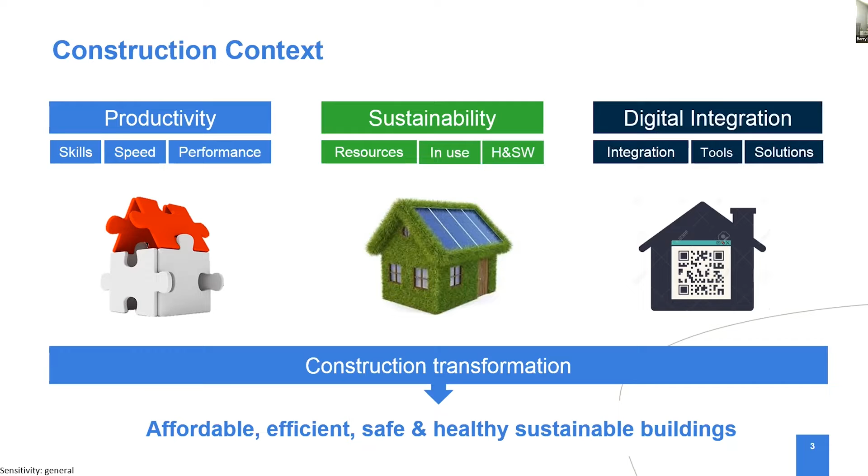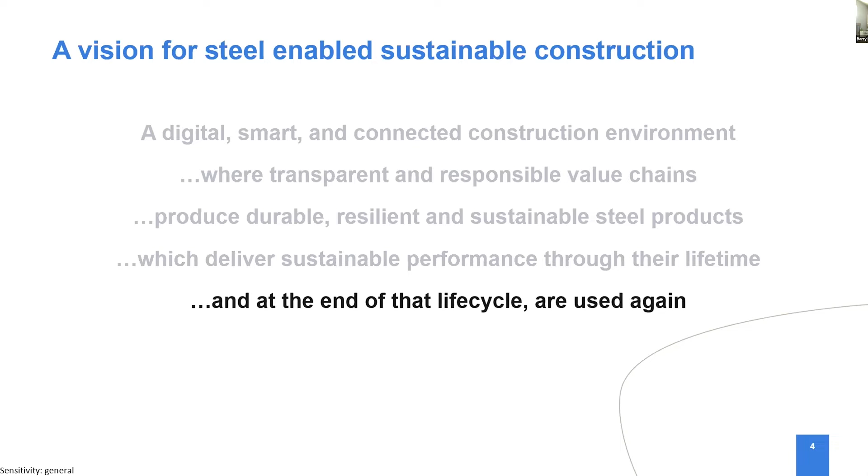So in that context, I'd like to describe our vision for steel-enabled sustainable construction. That is a digital, smart, and connected construction environment where transparent and responsible value chains produce durable, resilient, and sustainable steel products, which deliver sustainable performance through their lifetime. At the end of that life cycle they are used again. And if not used again, then they're returned to where they were produced to be recycled in a carbon neutral cycle with zero waste.

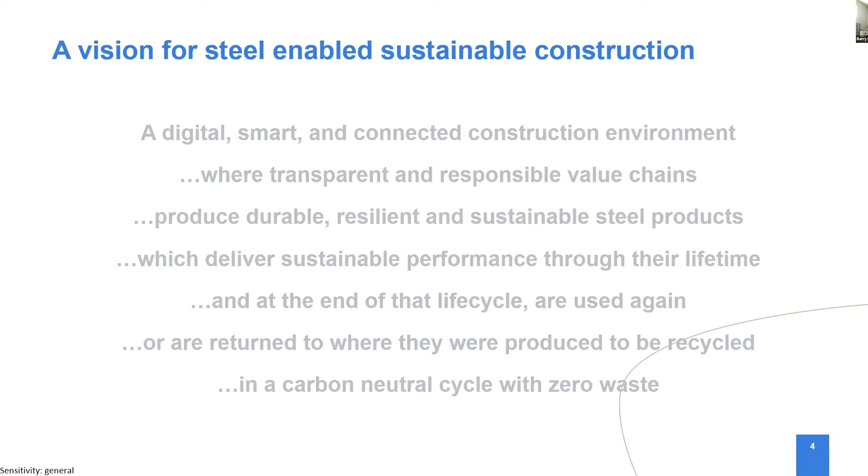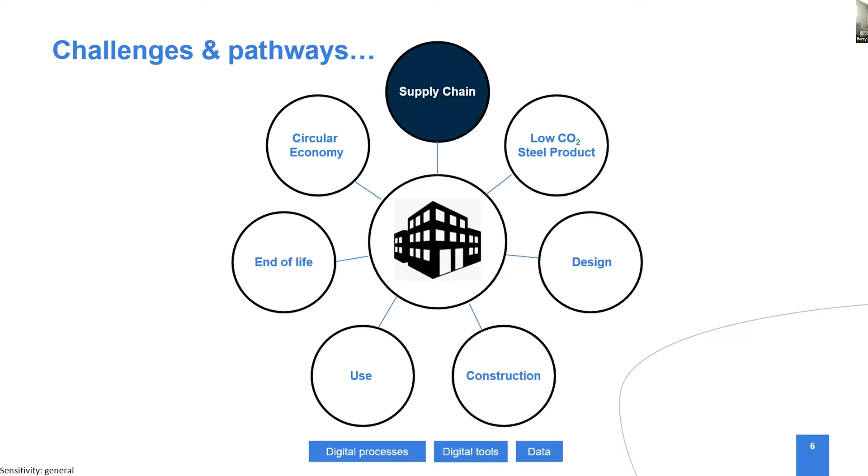Then shown at the bottom, rather underplayed in this schematic, but it's the only way I could think of fitting them in, is the foundation of digital processes, digital tools, and data, which will underpin and enable most, if not all, of this vision. So we'll use this schematic as our map over the next 12 minutes to describe the challenges and potential pathways to that vision, starting with the steel supply chain.

Stephen's already mentioned in his presentation transparency, reporting, and a just transition, which is absolutely essential. A key part of our work with the steel supply chain and the construction supply chain is around transparency and reporting. Those two items are also the foundation of our sustainable development work within Tata Steel.

Within Tata Steel, sourcing from responsible supply chains and our responsible operations are at the core of what we do. One example of that important work is the left-hand graphic here, which shows a BES 6001 certificate. BES 6001 is a responsible sourcing framework originally developed by the construction sector, as it happens, covering organizational management, supply chain management, and the management of sustainable development.

Our entire construction portfolio across Tata Steel, 14 product groups in total, is certified to this third-party and audited certification. In the center of this page is something I'm rather proud of, actually. It's a governance document for Tata Steel's Environmental Product Declaration Program. And Stephen already mentioned some ISO standards around declarations.

And environmental product declarations, for those that don't know, are a standardized way of describing the impact of a product in environmental terms over its whole life cycle, from raw material extraction to end-of-life disposal, reuse or recycling. And Tata Steel operate the only manufacturer-led ISO EPD program in the world. And we now have over 50 EPDs across our construction portfolio, all of which are third-party verified. And I reiterate that transparency and reporting must be the foundation of that construction transformation.

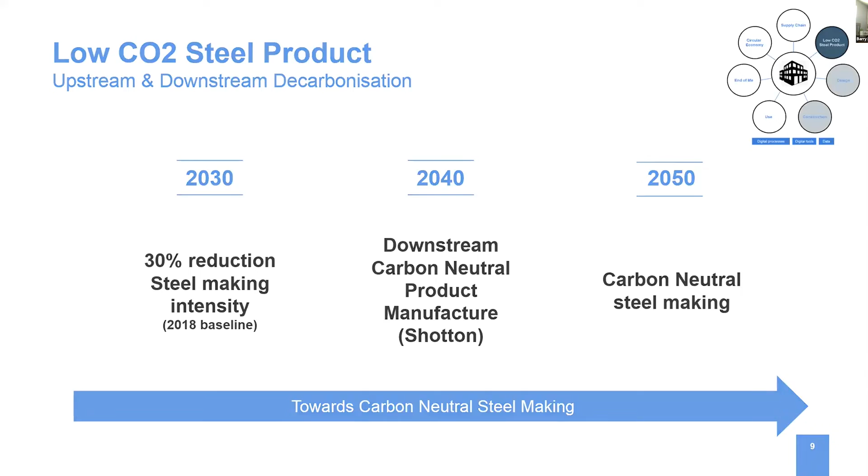So moving on to design and construction, here we'll focus on the productivity issue, which is being addressed through a number of potential solutions, and one of those is a modern method of construction called construction platforms. And the concept's pretty straightforward. It's based on the premise that buildings are designed at the moment as somewhat unique one-offs. This leads to a massive variation across building design and construction, and is the antithesis of economies of scale. And compare that with the automotive approach, where an automotive company might have 3 or 4 chassis, which are the foundation of its 15 or 16 models.

Now, the construction platforms approach borrows from this, with a small number of standard designs for building types and a relatively small number of parts or products, which, like the automotive sector, are homologated as well. This allows for standardization across the products, with the building components fabricated off-site, which can then be rapidly assembled through automated processes. All this helps to deliver the productivity improvements we've been talking about, as well as building with lower carbon intensity in a safer and more cost-efficient environment.

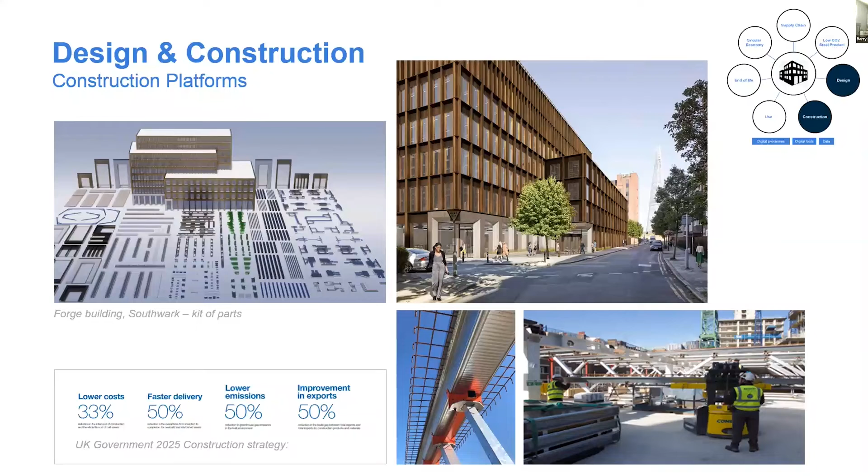So we could have talked about other modern methods of construction and the suitability of steel across those modern methods, but unfortunately we don't have time. But if any of these areas are of interest, or this slide's of interest, I'm not the expert on this particular aspect of Tata Steel's work, but my colleagues are. So please do contact us to talk about it if it's of interest.

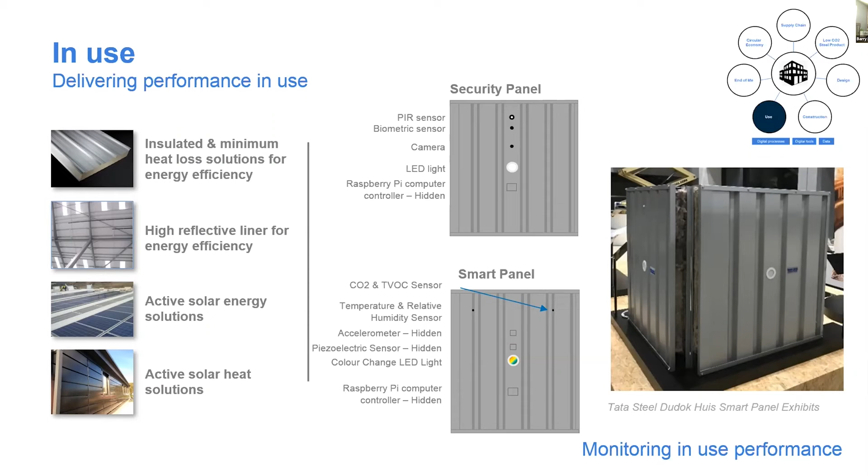So monitoring of in-use performance of buildings is an area that the construction sector really lacks data and understanding. And this feeds into an inability to understand performance gaps and how we might improve on those. So on the right-hand side of this slide here is an example of how steel-enabled construction products can assist in this challenge. So these are two insulated built-up panels with an array of embedded sensors and monitoring equipment. They were produced by Tata Steel panels. They were a Blue Sky pilot panel, and they were for an event in one of Tata Steel's facilities. But they demonstrate that the technologies and the capabilities exist to drive improvement in this area of in-use performance monitoring, and steel-enabled products can play an important role.

So we're moving on to a quiz, which might be rather boring because you can't shout out the answers, but I'd like to do a quick quiz on a spot the difference. So here we have two pictures of the same skip, which is in front of the garden of one of my colleagues who's having a new kitchen fitted. In the skip on the left, we have a range of waste materials, lots of waste wood, which is typical of a construction project, some concrete, some glass, and a couple of steel and cast iron items. Effectively the oven that he was taking out and the iron grating from the hob itself. And on the right hand side, we have an image taken only a few moments later. And so can you spot the difference?

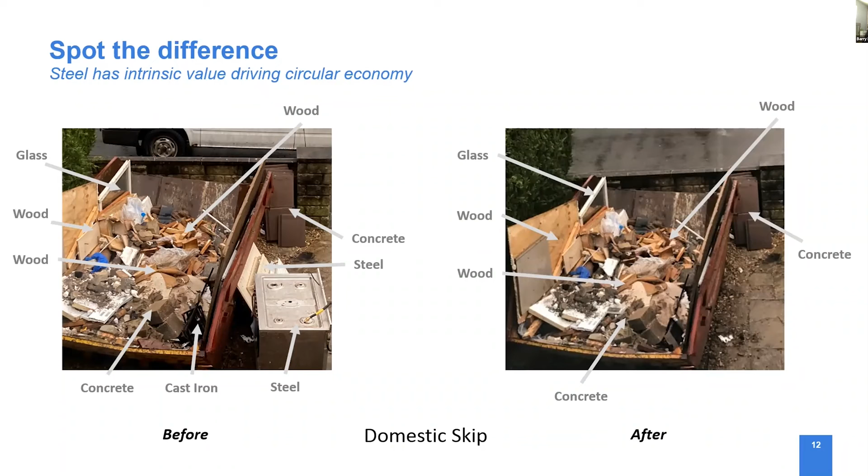Yes, the metal's gone, the steel's gone, the iron's gone. Why? Well, because our local circular economy operatives have removed it. And that's because it has value, and that value will enable circular economy. And that material will go back into a steel supply chain.

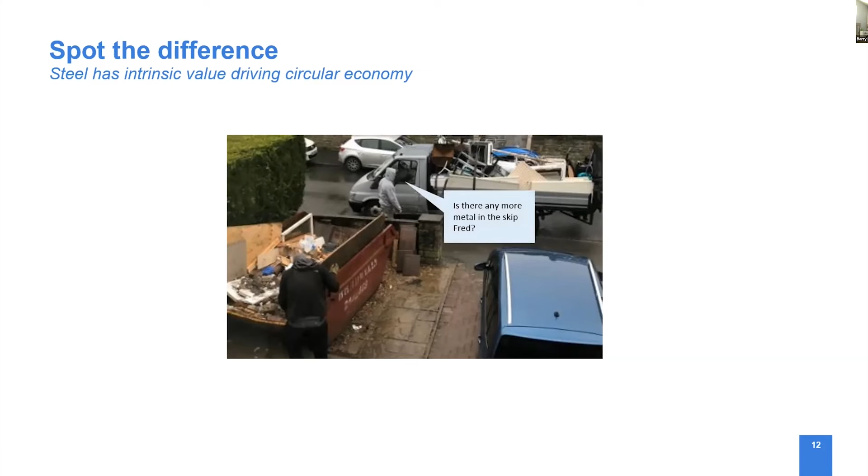And I think most people, certainly a lot of people on this call, will be very aware of the credentials of steel for recycling, and there's still challenges around that. Contamination, Stephen's already mentioned, but we mentioned in our vision reuse, which is where we would also prefer to be in terms of the waste hierarchy.

And in the steel, this was achieved by adapting anchor bolts for demountable beams and column connections. All the cladding connections weren't shot connections, they were demountable connections. And the design utilized standard beam and column dimensions for the entire build for consistency through the build.

And standardization, of course, is only one of the many, many challenges for a future reuse market. And all the materials were catalogued in a building material passport, or a database containing all the steel specs and dimensions for future reuse reference.

So finally, a key to much of this vision that I've described today and those pathways and challenges is data, digital processes and digital tools, both through the steel and construction supply chain and the life of the steel product or the building. And I'll focus here on one aspect as an example, and that's our work at Tata Steel on our tag and track development.